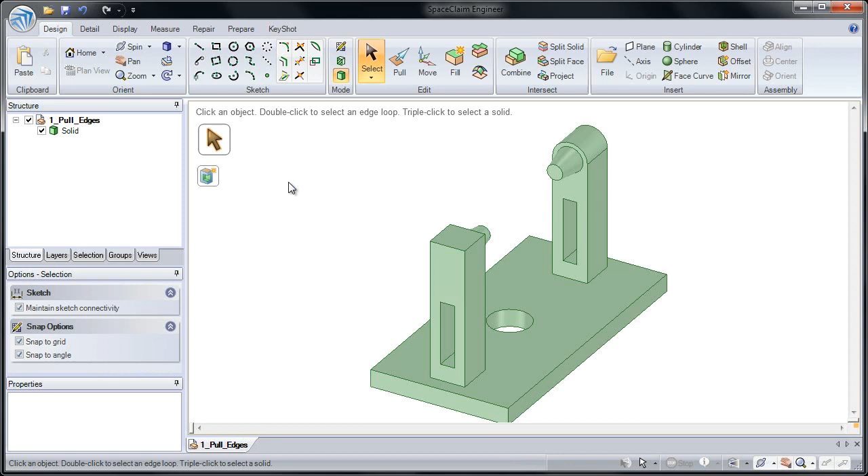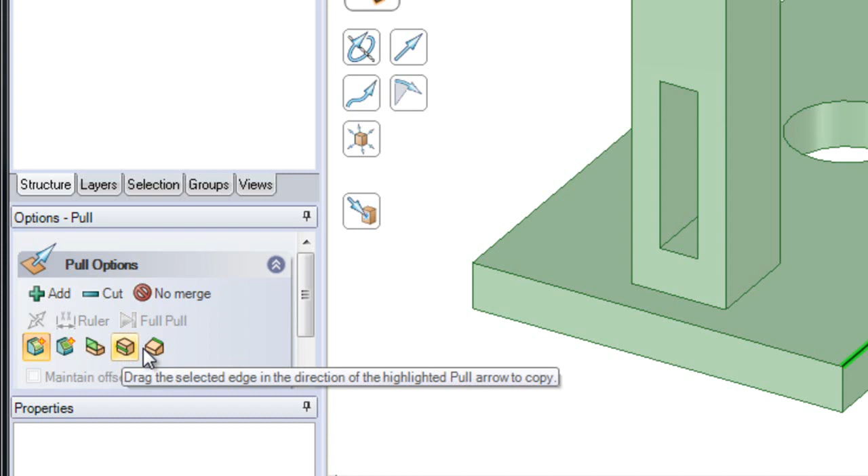In SpaceClaim, there's several ways edges can be pulled on to make modifications. If you look in the Options panel, you'll see that there's 5 different ways you can change an edge. Edges can be rounded, chamfered, extruded, copied, and pivoted. And we'll see what that means during this section.

First, if I click on a single edge, you notice the default action is to create a round. The second option we have is to create a chamfer. So we'll choose chamfer in the mini toolbar, and that's the exact same thing as picking it in the options panel. There's no difference between picking them in the pull options or to select an edge and pick it in the mini toolbar. Here we can pull one chamfer,

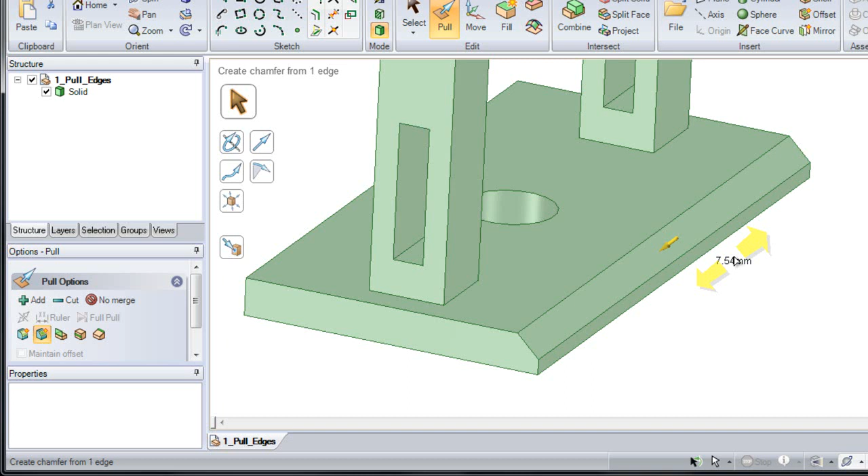or if I double click an edge loop, it'll grab all 4 at the same time and I can chamfer them together. I'm going to type in 5 millimeters.

Next, let's look at extrude. I'm going to double click the bottom edge, and if it grabs the incorrect edge, remember you can double click again to cycle through the different possible edge loops. Now that I have the bottom selected, I'll switch from chamfer to extrude.

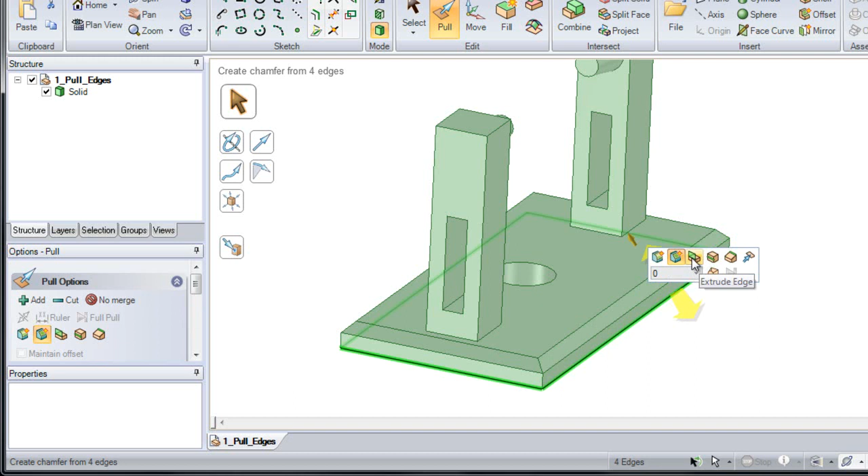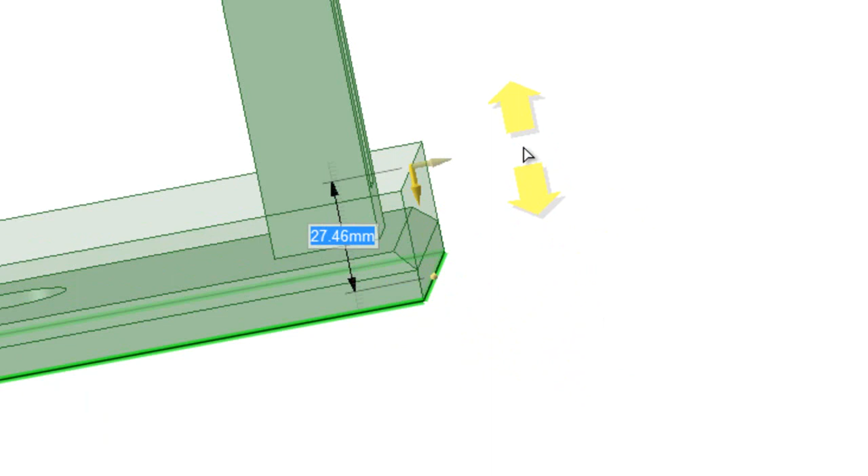Notice when I do this, 2 arrows are shown on the edge. And you'll notice the arrows next to my cursor are facing left to right. To make them face vertically, you can click on the down arrow, and now they're pointed vertically. So we'll be pulling this edge up or down. I'm going to escape to cancel that.

You can pick the arrow by clicking on it, or by hitting the Tab key, you can tab between those 2 arrows. And we'll want to pull this outward. So make sure the arrow is facing left to right, and drag the surface outward and type in 20.

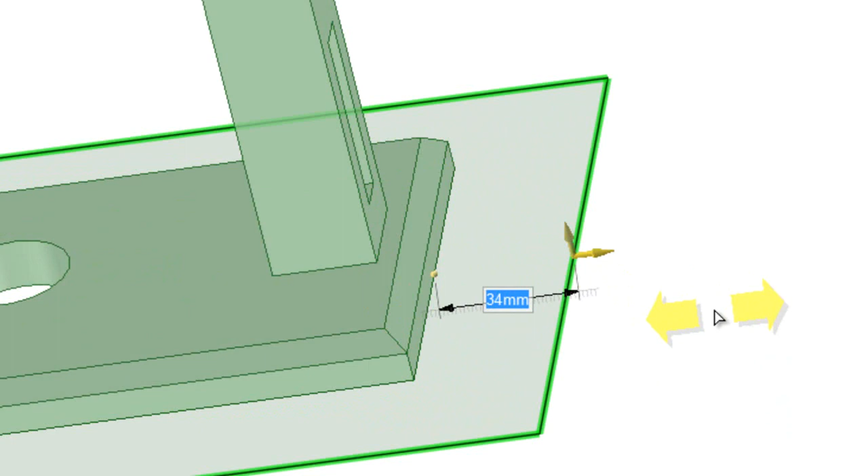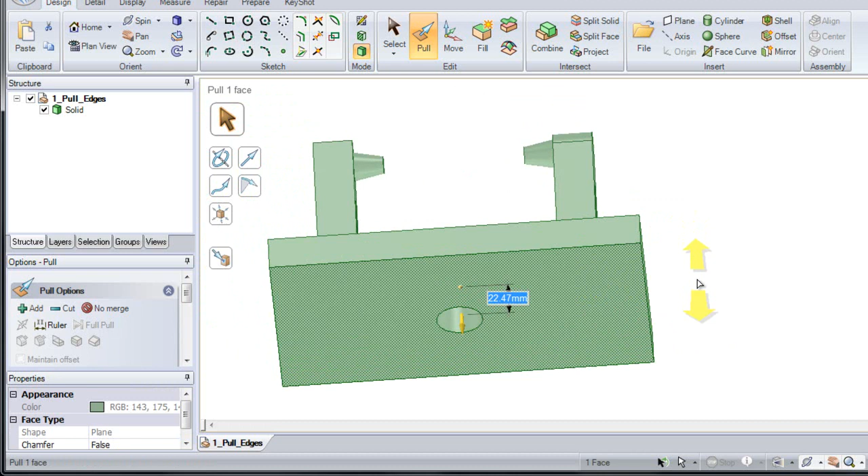Now you'll notice that a new surface has been created in the structure tree. Extrude offsets that edge and creates a surface. Now we can select on the bottom face of the solid and the surface to pull them both at the same time. You'll notice this makes a nice little box on the bottom of our model.

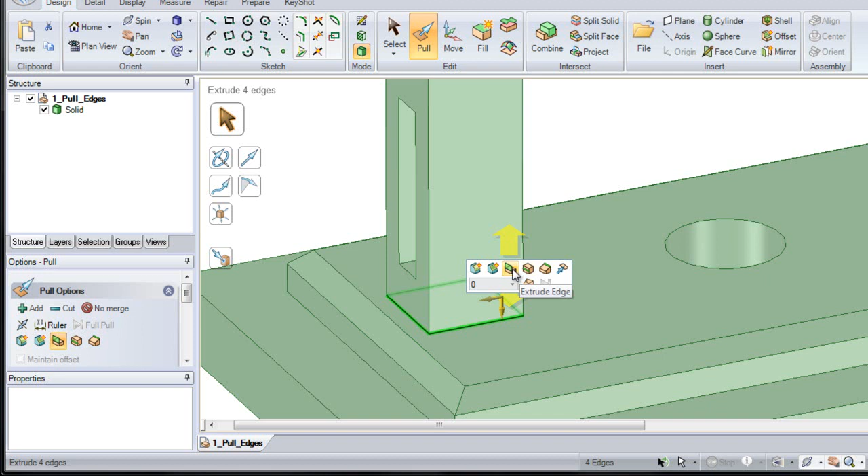Now let's look at the next option, which is copy. I'm going to double click on these edges until I get the bottom loop. We've looked at round, chamfer, and extrude, and next we're going to look at copy. But first I want to show you the difference between extrude and copy. Right now I have extrude picked.

If I tab to switch arrows, I'll pull this outward. And you'll notice that as I pull this, it makes a new surface, and we can see the surface in the structure tree. I'm going to undo with Ctrl-Z or in the Quick Access toolbar. I'm going to switch to copy, and I can switch inside of our Pull Options panel in the left middle side of the screen.

When I'm copying edges outward, you'll notice that it doesn't create a new surface. It simply subdivides the face into a new region. And notice if it gets large enough, it gets trimmed by the edges of that face. I'm going to pull this out 10 millimeters.

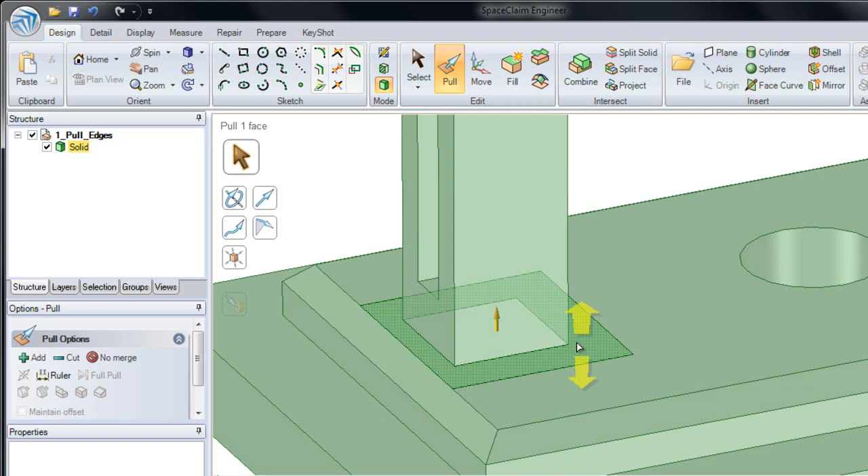Copying edges on a face is a very fast way to offset them. It works just like the offset tool does on sketch curves. Now our top face is subdivided into 2 sections. As I pull on this face, you'll notice that the face below it gets extended as I do so.

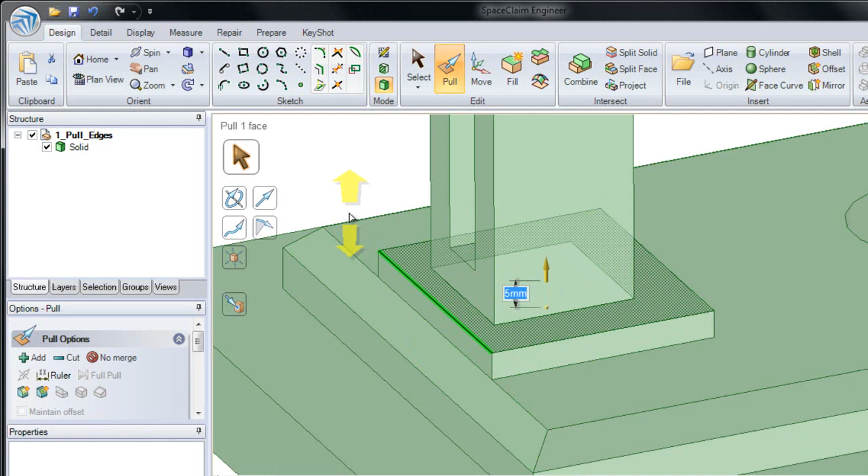Remember, to ignore the influence of the chamfer, I can select the edge and the face itself. Now I can pull this up or down and not have the chamfer follow it. And I can pull this up 5 millimeters. Now in most cases, it's not a good idea to have a chamfer come right up against an edge, it can make it difficult to modify that chamfer.

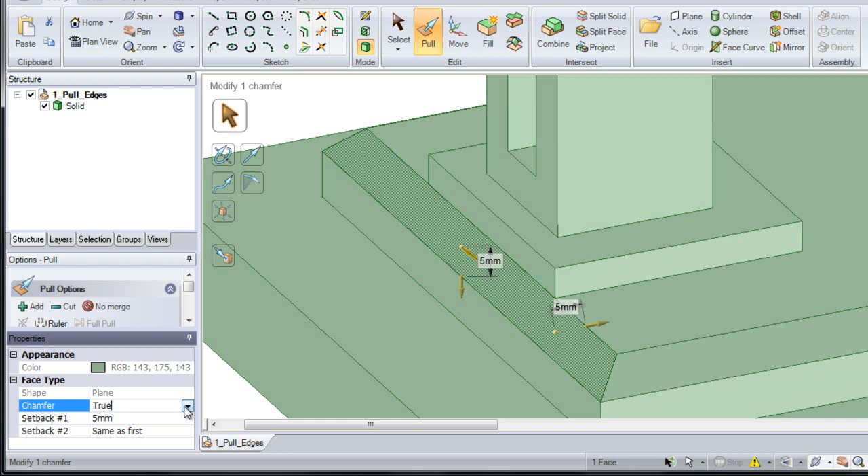If you ever need to remove a chamfer property from a face, you can always look at the Properties panel. This is where I can change the setbacks or remove the chamfer property. By switching that to false, the face will edit just like any normal face. So you can pull it to make a change, or we could remove it by filling it in.

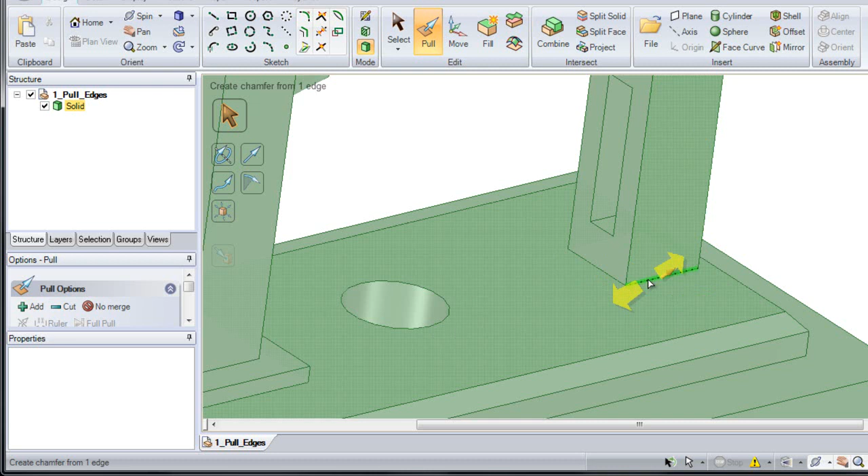Now let's look at pivot, our last edge option. I'm going to select on our edge on one side and Control select our edge on the other by rolling the mouse wheel through the model as I hold down the Control key. Now you'll notice I have our last pivot option all the way to the right. Just like copy and extrude, there's two ways I can pivot these edges, and I can tab between them.

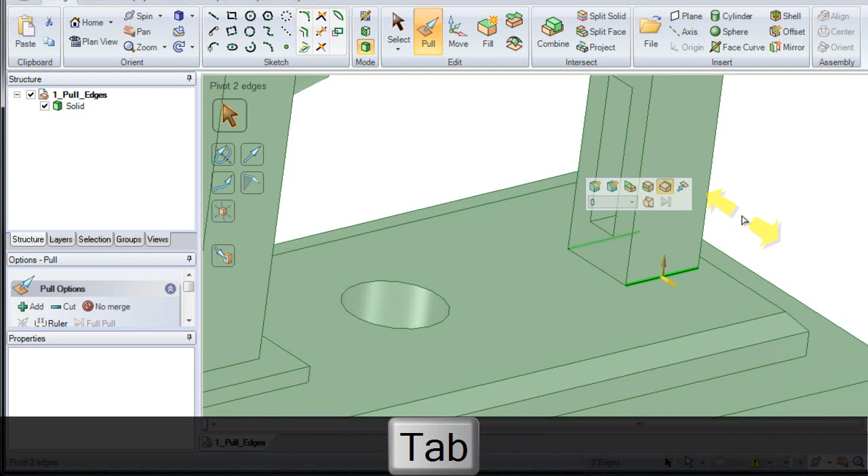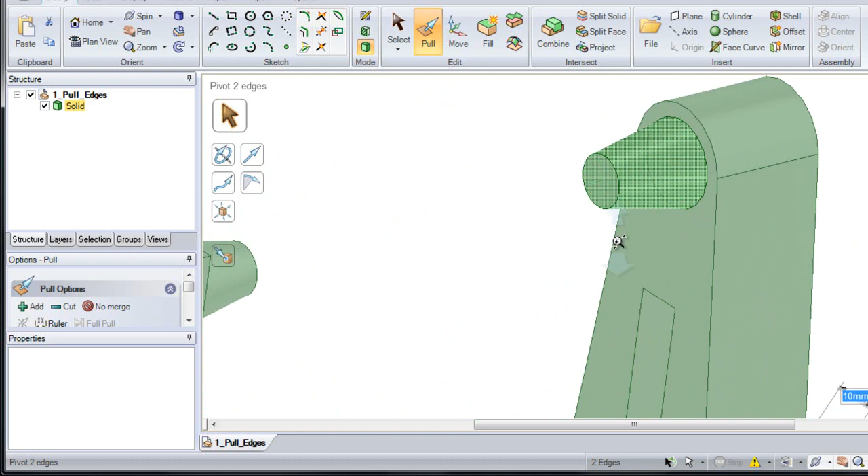Now that our direction has been chosen, you'll notice that pivot offsets the location of these edges, pulling them to the right and growing them, or pulling them to the left to shrink them. Now I can type in a value and hit enter. You'll notice it also works on circles, allowing you to pivot edges larger or pivot them smaller. Notice this gives me the offset dimension from where they were originally.

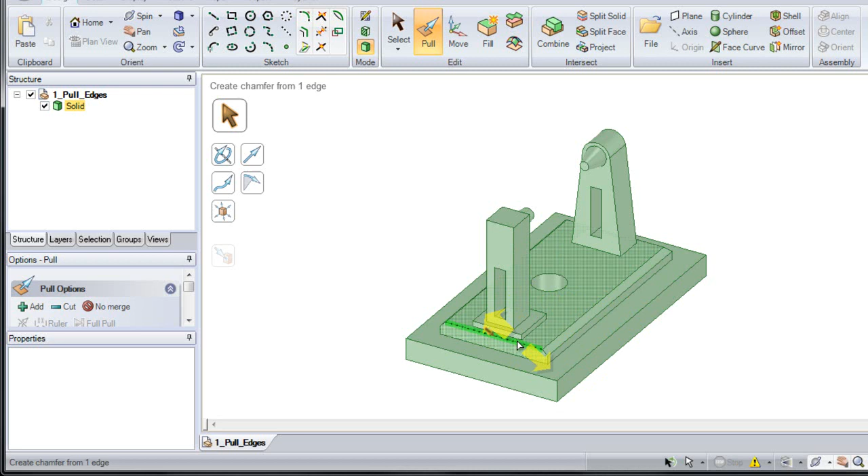So in this section, add chamfers to the top edge loop, offset to create the base, use copy to create this little box, remove the chamfer property, and try pivot.